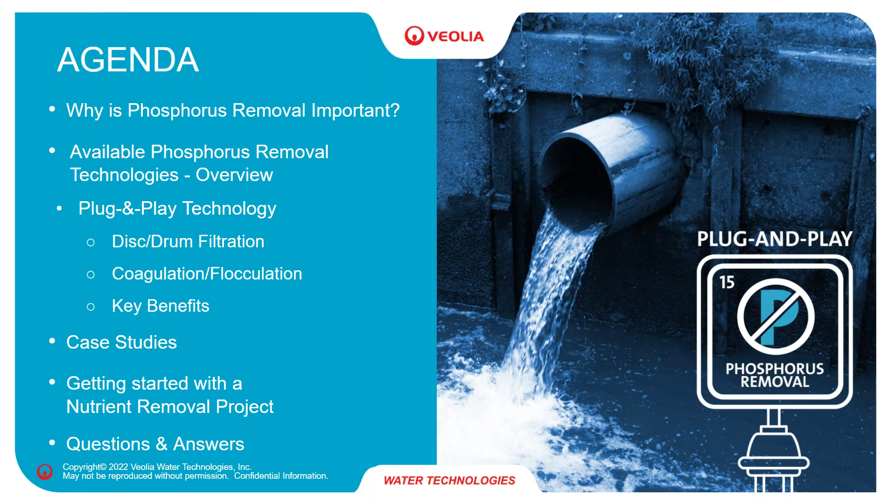We'll talk about those benefits, and we'll share with you some real-world sites that have been able to implement this successfully, those case studies. Finally, we'll sum up with a few tips on how we can coordinate with you and help you get started if you have a phosphorus removal project you want to look at. And then we'll have some time for questions and answers at the end.

So as I said, we'll start with a little bit of groundwork. Why is phosphorus removal important? It really comes down to our environment and the impact that nutrients can have when discharged into the waterways.

When these nutrients, nitrogen and phosphorus-based compounds, get into the waterways, it really results in the algae that is present in those waterways using that and growing excessively. This is called eutrophication. And when they do that, they're uptaking the oxygen in the water, and that has a negative impact on the aquatic life. So many places will see fish kills and other damage to the ecosystem there, which is not a good scenario.

It's also can be quite unsightly from a tourism and swimming type scenario. So definitely things that the governments and the people have decided that this is not something we want to continue.

In terms of sources of where this comes from in wastewater, it can be residual nutrients from the processes that a particular plant may have. Could be cleaning chemicals - many of those use phosphate type compounds in their chemicals and detergents - and then nutrients inherent to just organics. So farming and even municipal wastewater carries with it nutrients laden in that.

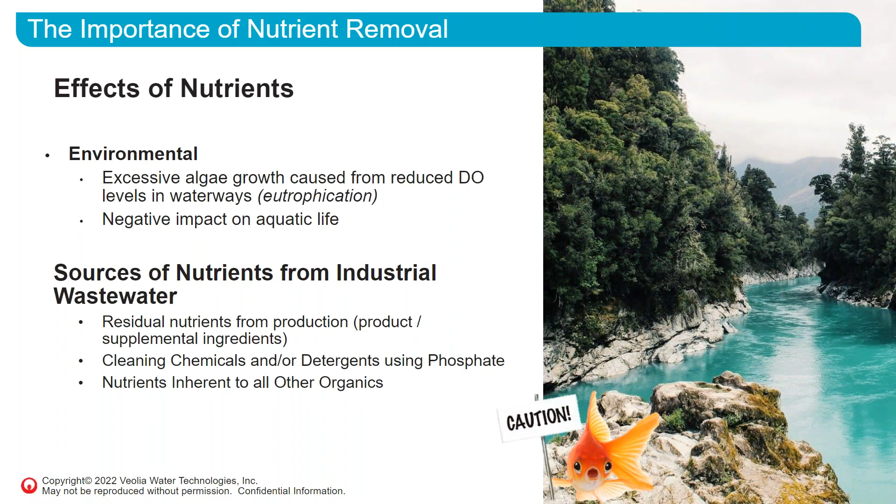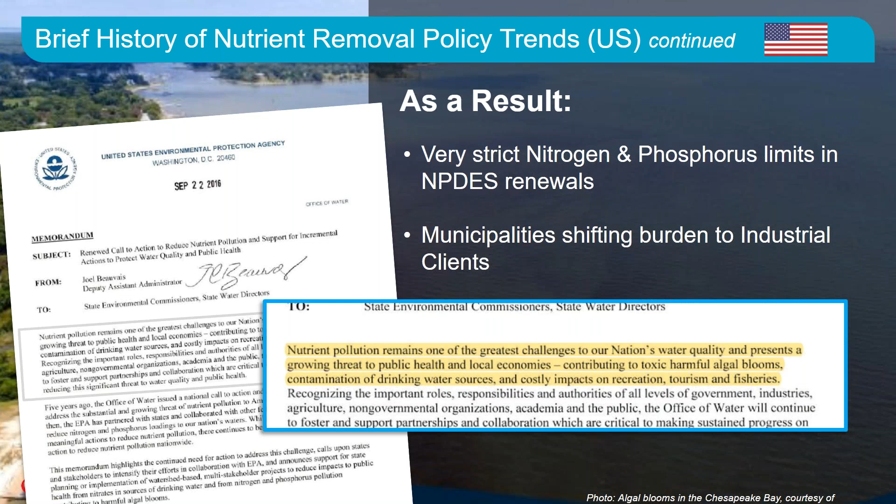Nutrient pollution remains one of the greatest challenges to our nation's water quality and presents a growing threat to public health and local economies, contributing to toxic, harmful algal blooms, contamination of drinking water sources, and costly impacts on recreation, tourism, and fisheries.

We have many attendees here, I believe, from Canada as well today, and a very similar scenario, although regulation for Canada is really at the provincial level. Nonetheless, an evaluation is really made at the local level with these receiving water bodies to determine how sensitive they are and what types of impact the wastewater could be having coming in, and what the limits need to be as a result to try to limit and improve those impacts and improve the water body.

As an example, in British Columbia, while sea outfalls really don't have any requirements overall, the province has a 1 milligram per liter total phosphorus limitation, but then sensitive water bodies such as Okanagan Lake can have more stringent limits, as we see here with a total phosphorus of 0.25 milligrams per liter.

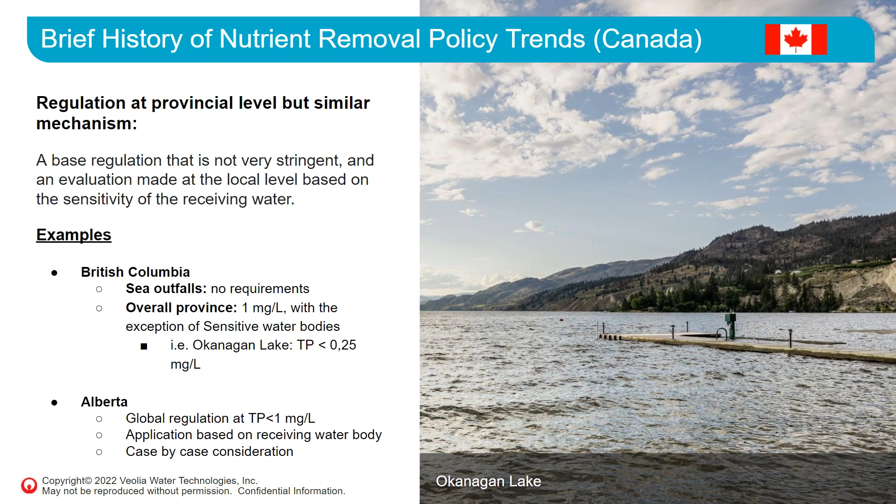And then again in Alberta is another example - global regulation within the province of total phosphorus less than 1 milligram per liter, but it can be a case-by-case consideration on whether a receiving body may need to have more stringent limitations for those ones that may be discharging into that water body.

Now, what are some key applications that could be affected by this? Well, it really is a wide spectrum, as you can see here, from dairy, food and bev processing, meat packing, fertilizer producers, metal finishing, where they can use phosphate type chemicals in that process, and of course municipal wastewater, as we mentioned earlier.

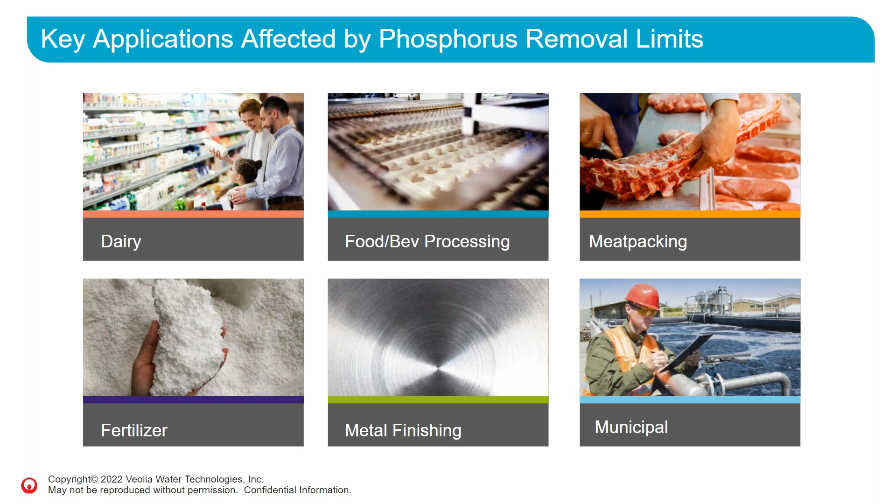So this certainly doesn't cover all of those industries, because at the end of the day, if you have a limitation that needs to be met, then you're impacted here by this and the need to remove the phosphorus.

So we're going to go into the discussion of technologies, and from sort of a big overview perspective, many plants will have many stages of treatment. You could have primary treatment to remove solids at the first stages of the plant. Many times these stages, if the plant has a nutrient removal, will implement chemical dosing to enhance their primary treatment in order to start to remove the phosphorus.

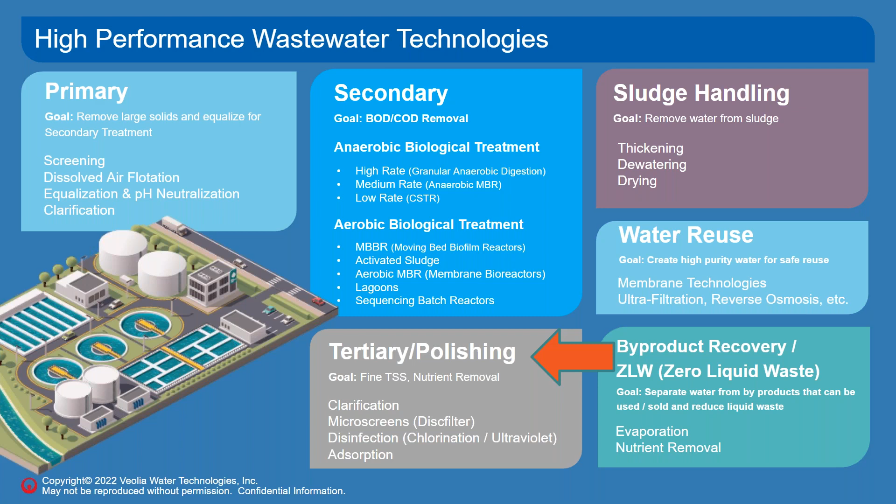Secondary treatment is another key component, where you can have typically biological treatment to help with removing phosphorus. That's very effective. The technology we're going to share about today would usually be considered the tertiary or polishing step, to really get to the low levels of phosphorus removal and effluent limitations that need to be met.

When we talk about phosphorus or nutrient removal, today we're focusing on phosphorus. There's two main categories or methods. One is biologically, systems like activated sludge, sequencing batch reactors, MBBR, membrane bioreactors. All of these use a biological treatment system with bacteria using the nutrients and uptaking them in order to process and remove them through the floc, being disposed of through the biological sludge from those processes.

Alternatively, you have physical or chemical methods of removal. Physically, we're talking about clarification, so settling, either traditional clarification with large retention times and a settling mechanism, or high rate clarifiers that use methods to speed up the process and get solids to settle faster. Could be flotation, could be filtration, from media filters to actual cloth filters. But many times phosphorus is not only in a solid form, it can be dissolved in the water. When it's dissolved, a chemical step is needed to turn that from a soluble form to be precipitated with a chemical reaction into a solid form. That's what we're talking about with coagulation and flocculation, and those steps can be combined with physical separation to increase phosphorus removal.

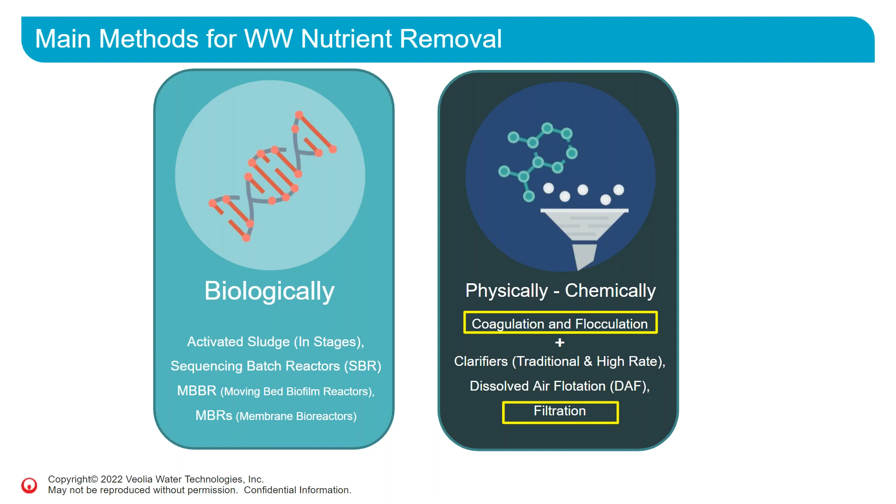All right, continuing then with just a very rough, not highly detailed, but from a general standpoint, most sites will be able to use biological treatment for achieving levels down to about 1 milligram per liter of total phosphorus. Having said that, these other methods can also be used to take higher levels down to that as well. But oftentimes many sites, if they have biological treatment, will achieve about 1 milligram per liter with clarification and settling or flotation, whatever process they have on site, maybe with some backup means of coagulation for trimming and meeting their effluent limitations.

Typically, to get down to less than that, into the roughly 1 to 0.5 range, a client may need to add another step behind the clarification method. That could be microscreens as an example of filtration following the clarifiers. That will typically get to about 0.5 milligrams per liter.

Getting down to below that, into the say 0.3, 0.2 range, would require an added step ahead of those filters with coagulation and flocculation, and I'll be explaining that as we talk further. That could typically get you down to as low as below 0.1 milligrams per liter, and then ultra low, less than 0.05, you're talking about quite intensive membrane filtration to achieve those limitations.

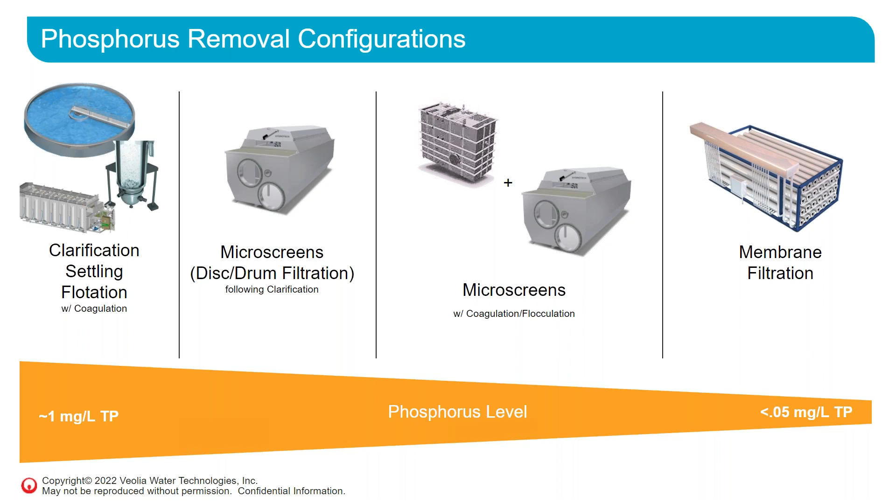So we wanted to share here with this webinar specifically the technology we call plug and play phosphorus removal process, which we've termed Nutri-Pack. Pack just being focused on the plug and play aspect and being able to package this together.

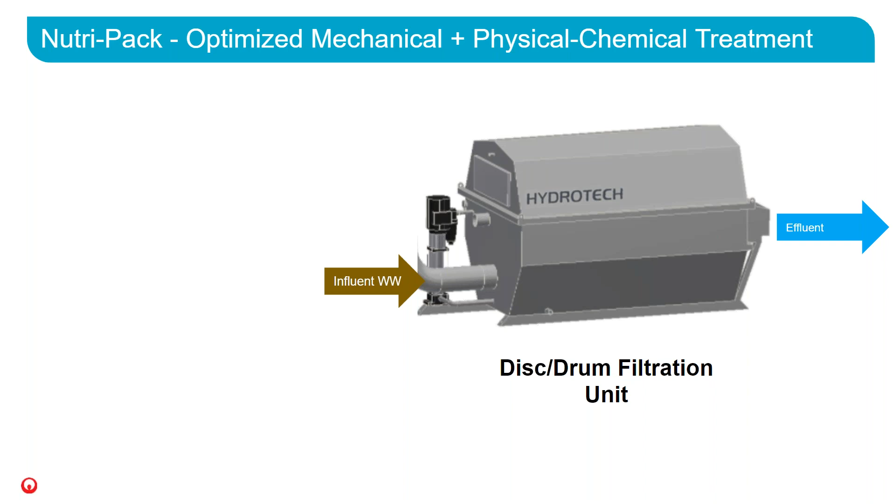This is focused around our Hydrotech filtration technology. It's been established for many years, and this is either a disc or drum filter. The exciting thing here is we now have a few categories where we have pre-engineered coagulation and polymer systems to allow this to be coupled up and get removal of not only particulate phosphorus, but if you have soluble phosphorus in solution needing to meet low limits, this can be added on and packaged with the system to meet those needs. We'll be sharing the details on this.

So first, to talk about the filters, Hydrotech filtration - this is a proven technology. I started selling the disc and drum filters in the 1990s, so over 20 years of experience with this technology, with continued development to improve it.

It's what we call an inside-out filtration process. It's very effective at solids removal. The media ranges from 1,000 micron in size down to 10 micron, and at those small 10 micron opening cloths, we can get very effective solids removal, up to 95% suspended solids, which helps us achieve high levels of removal when precipitating phosphorus and trying to get it out of solution.

Very small footprint when compared to other filtration technologies, particularly sand filters or in extreme cases clarifiers. This will be just a fraction, could be 10% or less of the footprint required to treat the same flow capacity. And then it's very efficient.

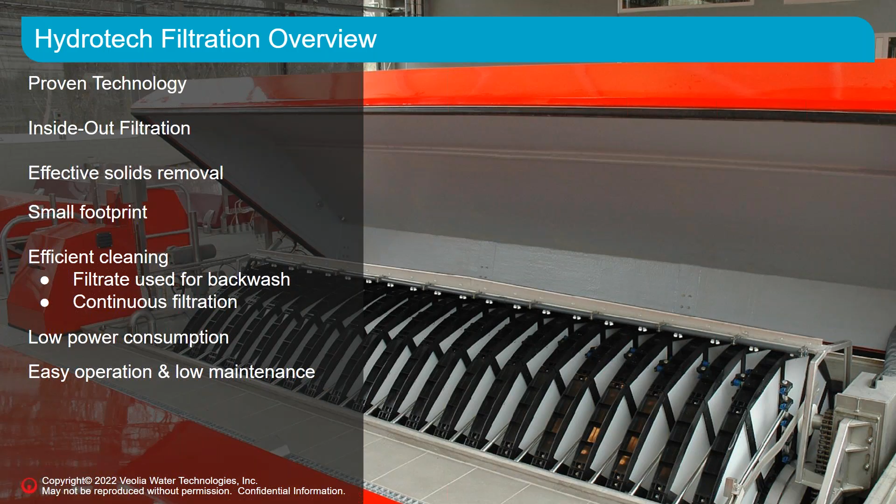For the disc filter, from that drum the water flows inside to the inside of discs with woven cloth media on each side. For the drum filter, the water flows inside and then goes through the circumference of the cylinder where the media is wrapped around the unit. But in both cases, the effluent flows to the clean side.

The solid particulate is captured on the inside of the media, and then the clean filtrate is discharged over an effluent weir.

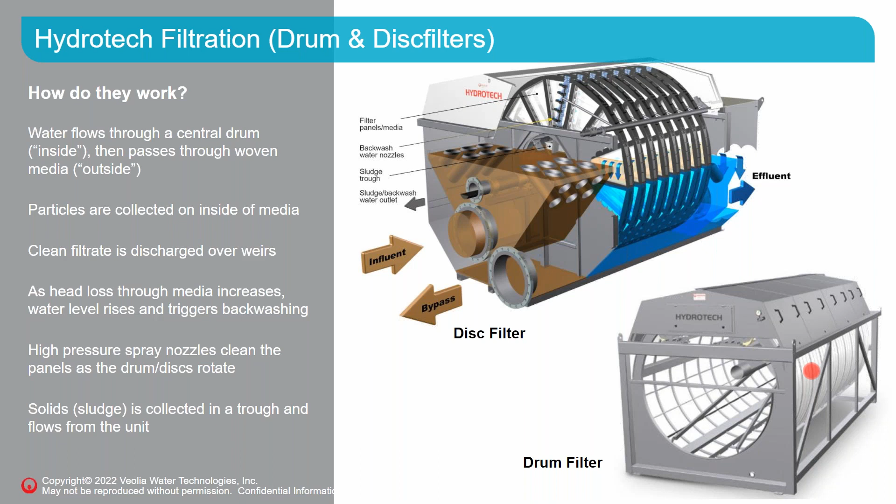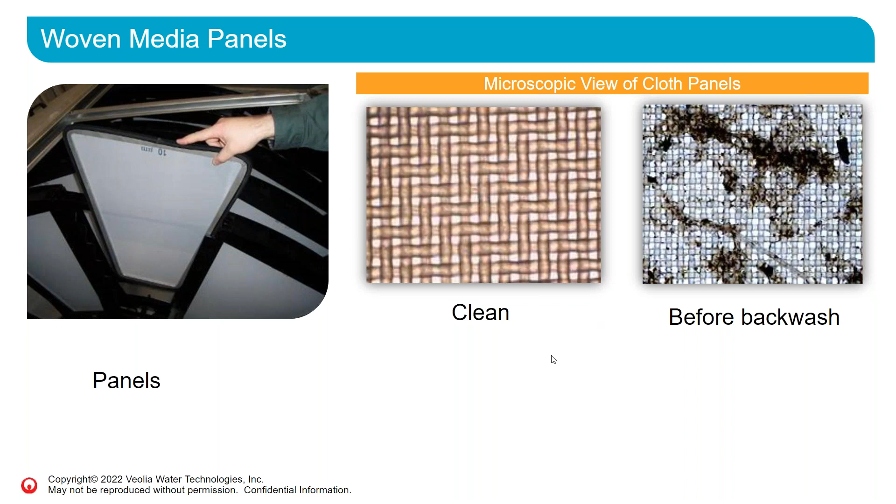Here's just a couple of photos to show you what a disc filter media panel would look like. You can see it's very accessible, easy to inspect, as well as easy to access for replacement if needed. Here you see microscopic photos of clean woven media, and then before backwash with the solids collected.

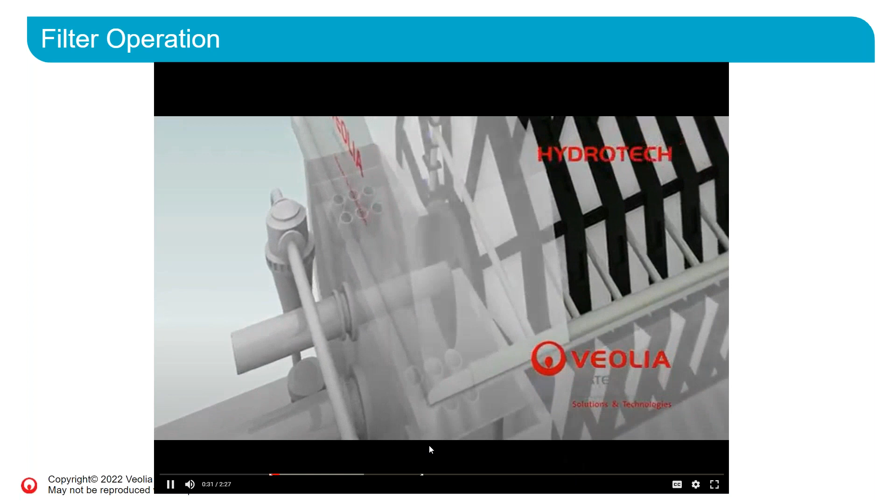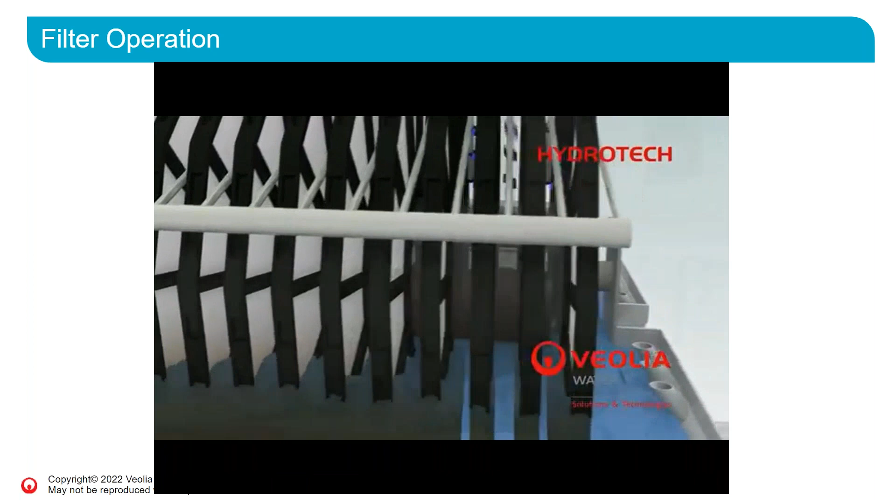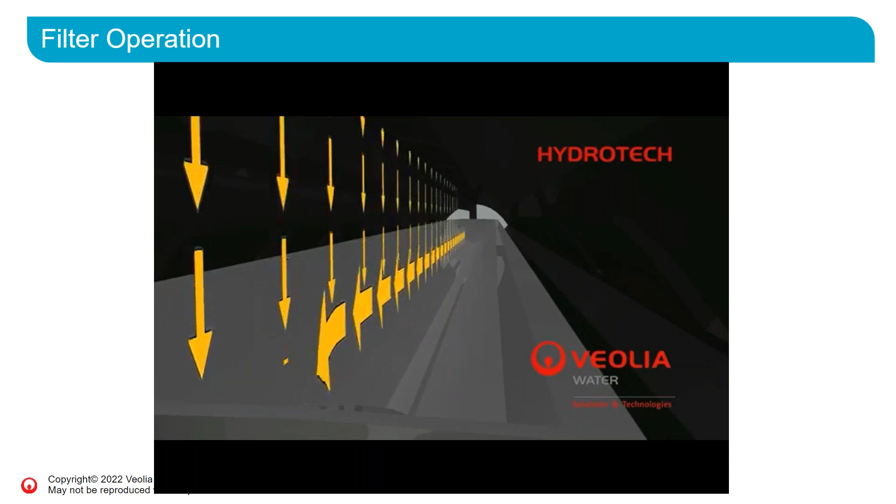I want to share a quick video here to talk through the process again. You can see with this computer generated animation the water coming into the central drum, flowing through the media panels, with solids being collected on the inside. The clean water flows out through the filter panels over a discharge weir. As solids are collected, the inlet water level rises and triggers the backwash, which starts the rotation of the drum and the high pressure spray to knock solids from the inside surface. When the solids are removed, they flow into the trough and gravity flow out of the unit with the backwash water and sludge being removed.

So now I would like to talk about combining that technology with coagulation and flocculation, because this is the key step when we're looking at phosphorus removal that is in solution. If we talk a little bit about pre-treatment chemistry, if we have influent coming in, we would need to dose some metal salt, typically based on either ferric or aluminum-based metal salts.

This will have a chemical reaction with the solubilized phosphorus and produce particles. However, these are typically what we would call unstable particles, not very strong or of adequate size for us to capture them on the filter media. For us, size and strength is critical.

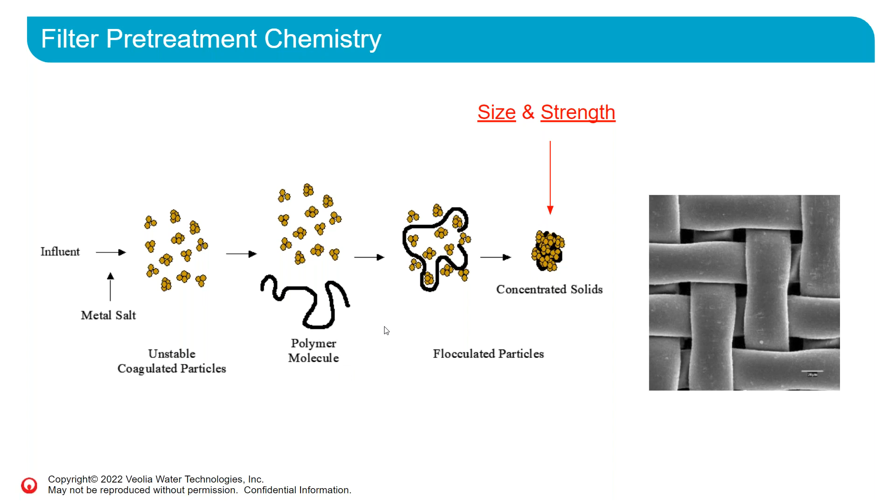And so polymer is typically added. You see the polymer molecule, which when combined with those coagulated particles forms a nice floc, concentrated floc that can be captured on the filter media.

And here's just an example site photo. This is a drum filter, but you can see really heavy, solid, good flocs there that the filter can then capture and remove.

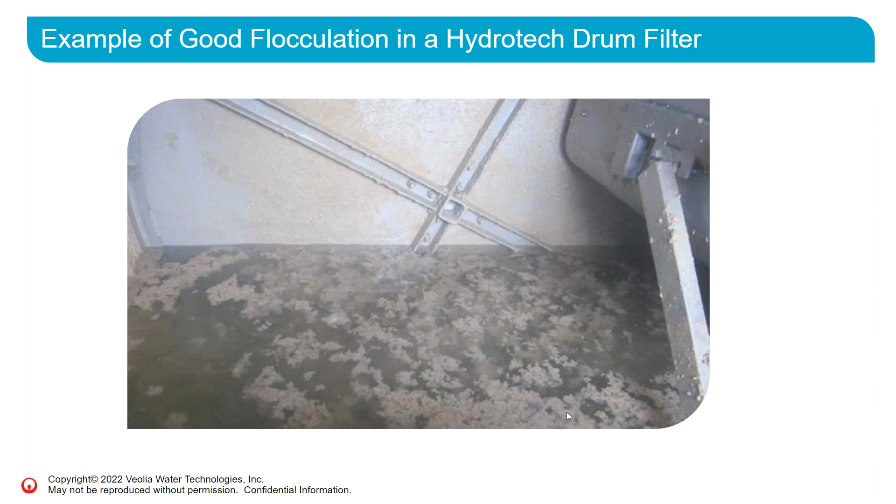Where does this fit in your treatment process is a question often asked, and it could vary depending on the site and what the needs are, but here's an example of a common location where it would be placed into the system. If the client has existing biological wastewater treatment, such as activated sludge, they may already be dosing coagulant upstream of their clarification step or flotation step.

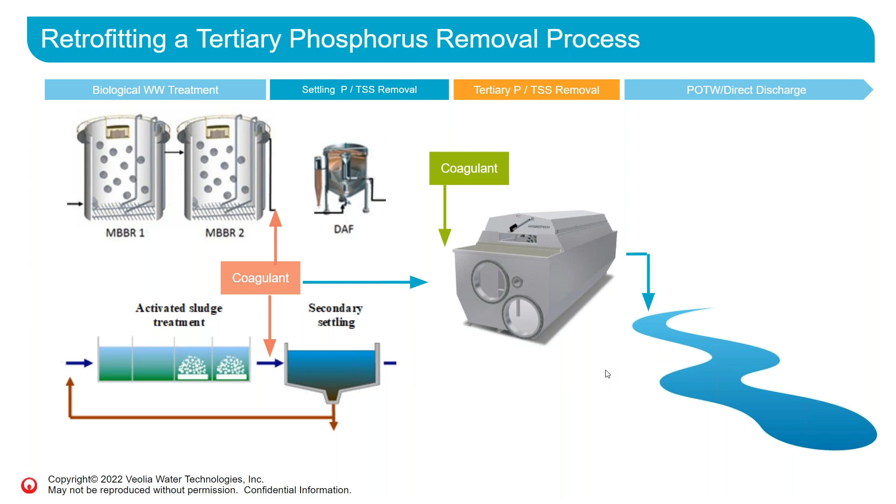And so this could be envisioned as a tertiary plug-and-play system to put in, depending on the limits, either with coagulant, which would be key if the phosphorus is in solution, or if they're close enough and feel like the 10 micron media can remove the particulate, then it may be adequate to just add the filter and achieve their demands before going either to the local municipal treatment works or direct discharge.

And here's a diagram just to show what we're talking about of the whole system here. When we're trying to remove soluble phosphorus, we'd have water coming in, dose the metal salt, as we mentioned, typically with a mixing stage with either a rapid mixer or a static mixer required to provide a thorough, good mixing of the coagulant in the water stream, followed by several minutes with a vertical stage mixer of coagulation.

Several minutes of retention time. After that, a polymer would be dosed before feeding into a flocculation stage with, again, several minutes of retention time and mixing before going to the filter. At this stage, we've built a good, strong floc of good size and strength that can be efficiently removed with clean effluent, and the solids can be collected to take to discharge.

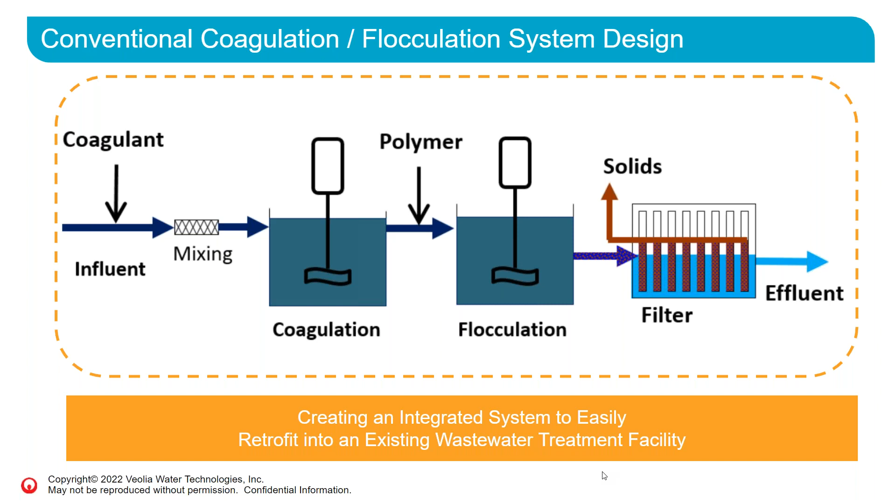What we really wanted to focus on here today is that this entire system shown in this box can be an integrated system that easily retrofits into an existing wastewater treatment facility. Certainly all these steps could be acquired individually, but we feel like there's a big advantage. The expertise and experience we've had implementing these systems has allowed us to key in on a few flow ranges and provide pre-engineered systems to make this easy for a facility to implement.

Again, that's what we're looking at here with the pre-engineered coagulation and polymer systems. This includes both tanks, mixers, and the dosing. We typically would use dosing pumps for coagulant and polymer included before feeding to the disc and drum filtration unit.

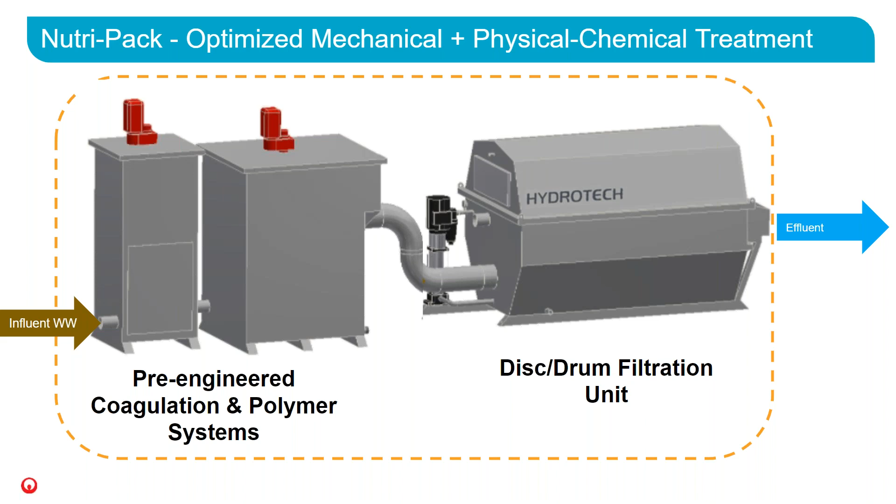And again, just to highlight what's included in that box, what is being provided here: we're talking about the coagulant mixing, which is several minutes of retention time with a mixer, and floc mixing, again several minutes of retention time, before going to the filter for discharge.

Also included is a coagulant dosing pump and polymer dosing system, make-down and dosing both. And then finally included with that is our control system with controls strategy PLC logic that we've developed with feedback and feed forward control, which we've been able to prove by using instrumentation to measure the water conditions to get a very effective, dialed-in dosage. Some of our clients have seen pretty substantial reductions in chemical usage, as well as savings in the volume of sludge produced because of the efficiency of that process.

Other options are digitally enabled remote monitoring connected to this system through the cloud. We can also provide semi-automatic deep cleaning. Many times when using chemicals, the filtration will need periodic cleanings, and there are several stages of cleaning that can be provided as add-ons to help with that process. And then finally, chemical and equipment services is something as well that we can offer to help the client as needed.

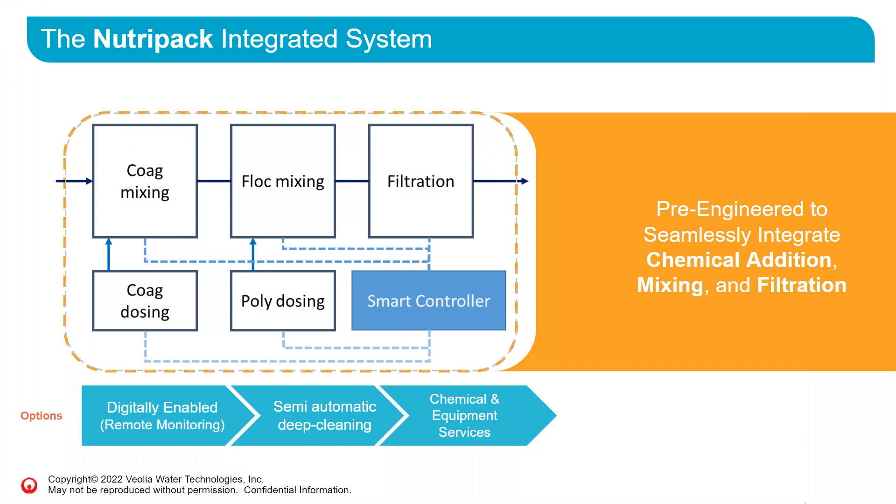So what are the key benefits of this NutriPack plug-and-play solution?

If we focus on performance, when you need to get these low levels of phosphorus—in some cases we're seeing locations with permits for less than 0.1 milligrams per liter total phosphorus—it's key to have a solution that can achieve that. We've proven it with pilot studies, R&D, and now full-scale operating sites. We can achieve a 90% reduction of phosphorus.

Also the total suspended solids, achieving a high level of reduction there. With the PLC logic we've developed, in both pilots and full scale, we've seen increased savings for sludge disposal and production, because you can target dosing compared to coagulant dosed upstream where it's not as effective. There could be interference from other sources such as carbon-based contaminants and pollution. Here you're dosing it downstream at the tertiary level, where you can really focus on the phosphorus and reduce coagulant consumption.

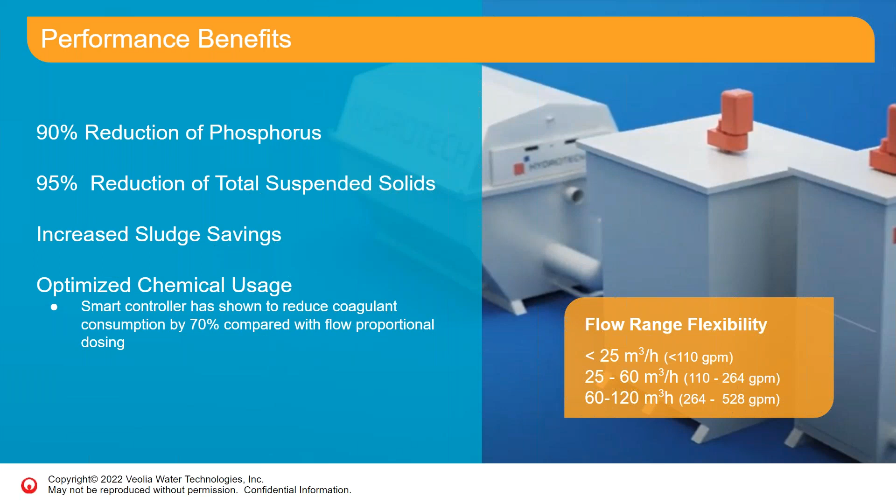One of the key benefits here comes down to footprint. We talked about performance—now, if we talk about footprint, this goes into a number of areas, but footprint, whether industrial or municipal, is often associated with dollars. Just as we'd sell a house at so many square feet or cost to build it, it's the same here for implementing a new treatment solution to help meet a limit.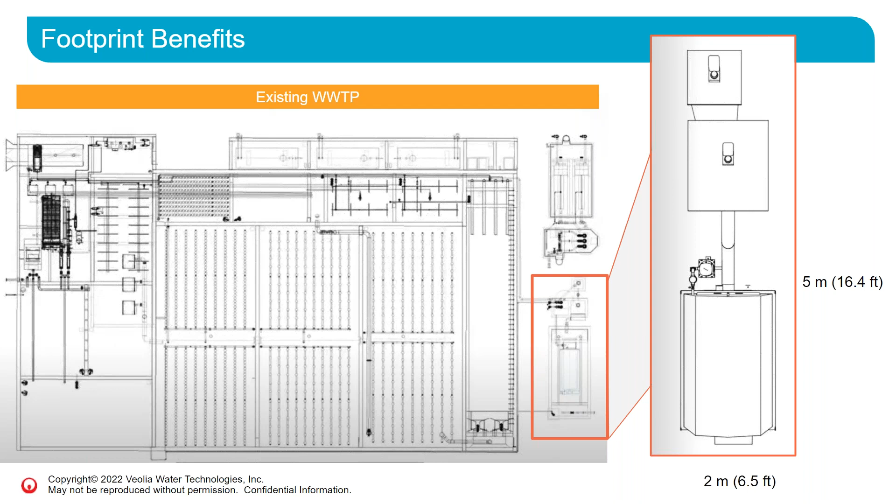Final benefits I wanted to highlight are implementation benefits. Again, these 3 flow ranges are pre-engineered—you can package this up with the tanks, the filter, the controls, and the chemical dosing, all pre-engineered and ready to go. This saves the client time and money, not having to research this themselves or have a consulting engineer chase it, or work with several different integrators—instead having one integrator for this solution, with in-factory mechanical and process checks to make sure it's functioning well.

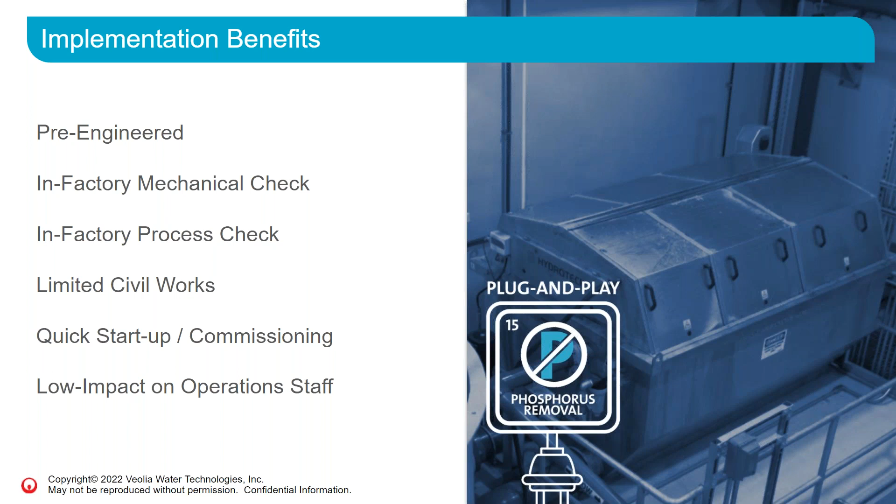There can be limited civil works, either to put this on grade, in a small building, or we can even containerize it to ship right to the site. There's a relatively quick startup and commissioning, unlike some processes that have long startup times—once it's piped and electrically connected, it's ready for service. And finally, there's relatively low impact on operations staff, since it's simple to operate and maintain.

We thought it would be helpful to wrap up with a few examples of how the technology has helped clients succeed. This looks more holistically at full-scale implementation, from large sites up to 30 million gallons per day, or almost 5,000 cubic meters per hour, down to very small plants at 70 cubic meters per hour, about 400,000 gallons per day.

Each client has different needs, some not as stringent, but many of these listed here target even down to 0.075 milligrams per liter. These clients are many municipal but also industrial, so this is a mix of locations, both municipal and industrial, using this technology for their phosphorus removal.

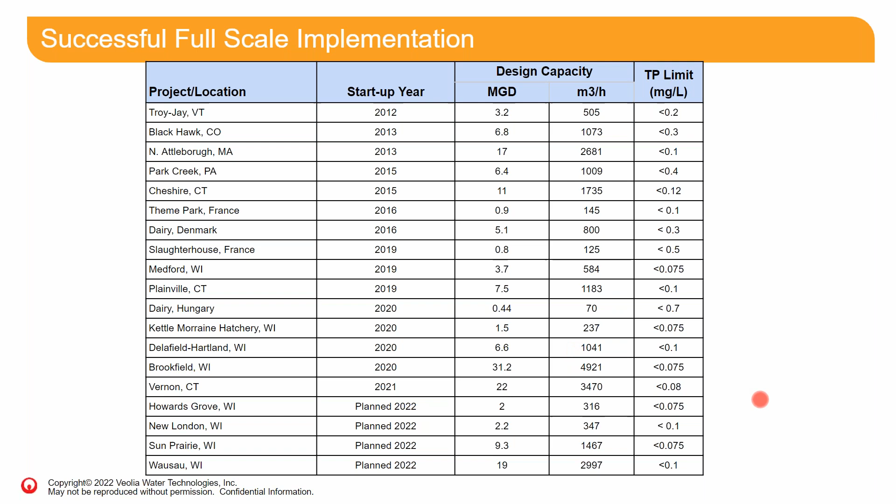Some specific locations. This is a location in Pennsylvania - a chocolate producer, many of you would well know the name. They had an overall need to provide an upgrade and replacement of their outdated wastewater facility. They also wanted to future-proof themselves, prepare for the future and what the limitations could be.

For their design basis specific to phosphorus, they were looking at an influent of around 7 as the design basis, and a need to meet an effluent discharge of less than 2. You can see in this case they have a number of biological stages. They have a DAF for flotation to remove solids, but they also had a need to implement a polishing step, the Hydrotech disc filter, with a flocculation stage prior to that, in order to catch and polish those final particles of phosphorus and get the limits they needed.

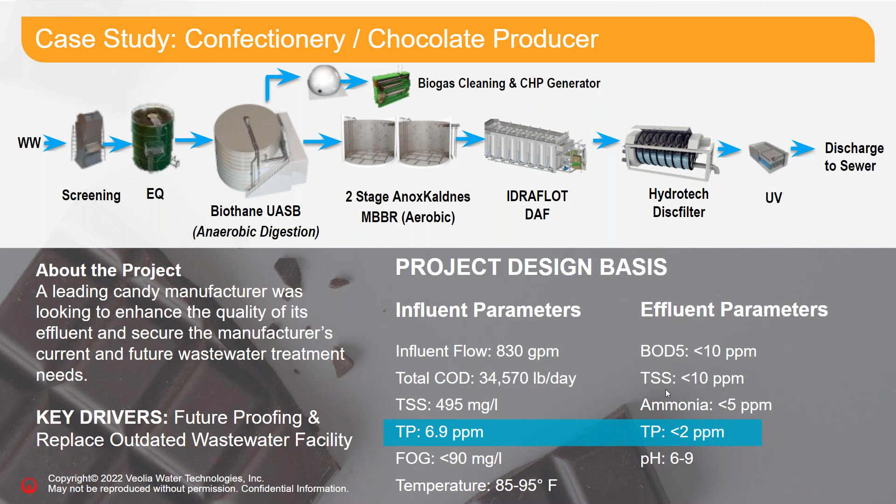Here's a graph to show some results we've gathered. These levels of total P are for the overall facility, and you can see that while the design basis was targeted at about 7 - 6.9 was the design basis, so about 7 milligrams per liter - it was actually in many cases even above 10 and up to 15 milligrams per liter. Despite that, they were able to meet the overall average target of less than 2 in the final effluent, with the disc filter being a key component of that treatment system.

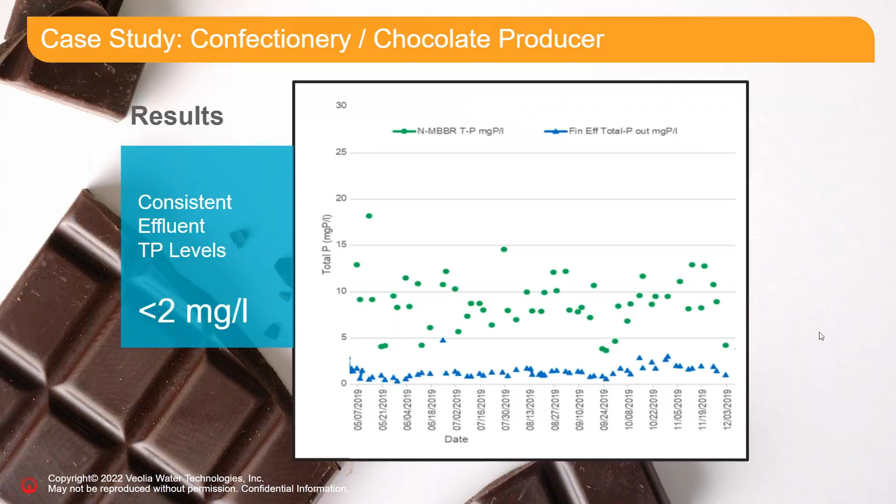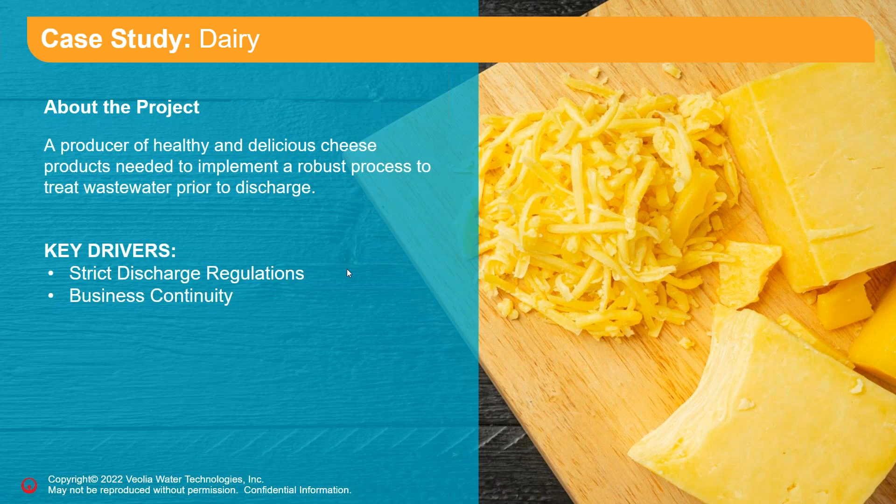Another case study here was a dairy client making cheese products, who again needed to implement a process to treat their wastewater prior to discharge. Key drivers here were really the discharge regulations and being able to keep this business running and meet their production goals. Their influent has averaged about 3 milligrams per liter. They are up and running and consistently meeting their target, which is stringent for them - their limitation was less than 0.7, and they are able to achieve that. This site has chemical pretreatment tanks upstream with coagulation and flocculation, followed by the filtration system.

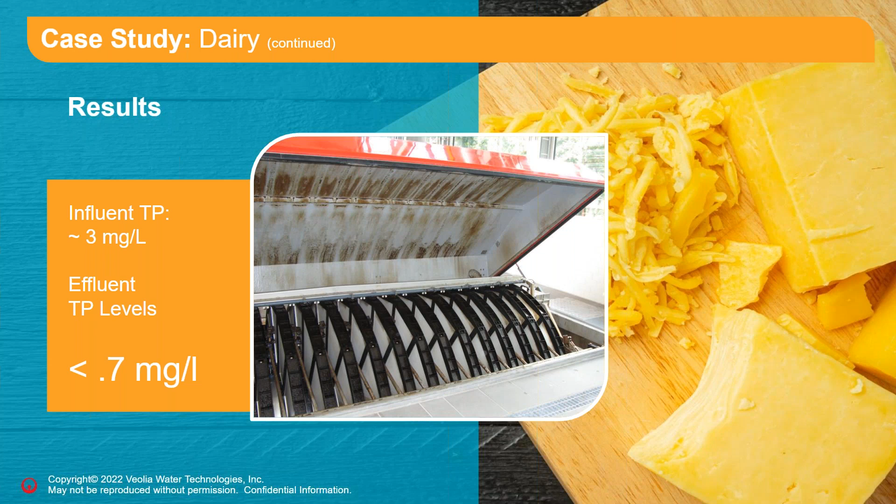I also wanted to mention this municipal case. This was an existing wastewater treatment plant with a target of less than 0.075 milligrams per liter of total phosphorus to be met by 2024. They were not able to do that with their current wastewater treatment plant. So of course regulatory compliance was a key driver for them, but another driver was to try to be compact and stay within the existing footprint of the facility.

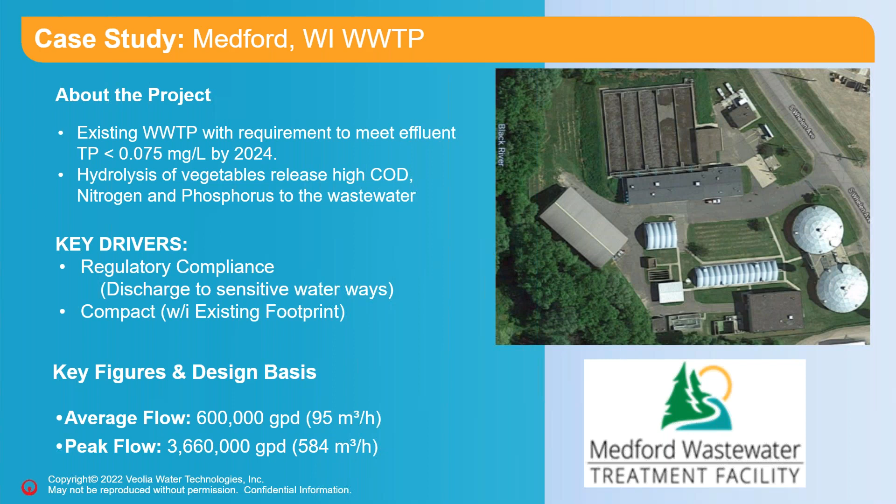The Hydrotech filters were a key part of that because they were able to be placed inside the existing infrastructure. These basins you see that the filters are installed in were prior sand filters. This was a big advantage to this site to be compact and fit into their existing footprint.

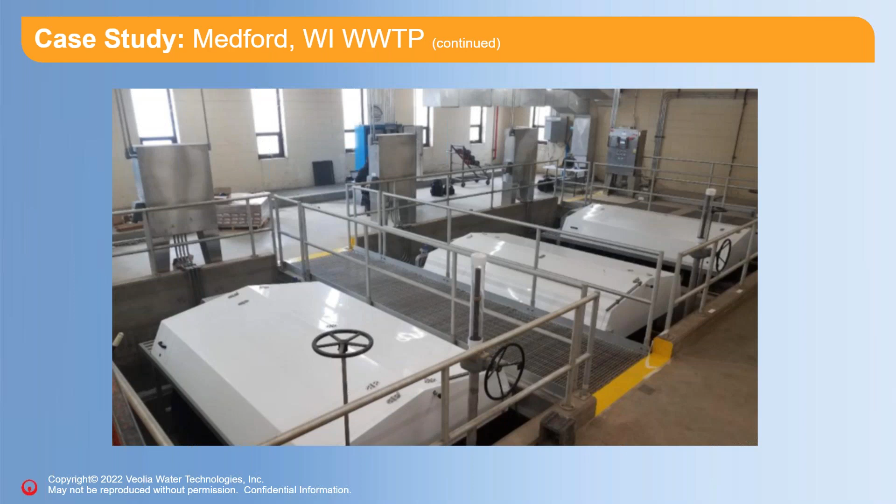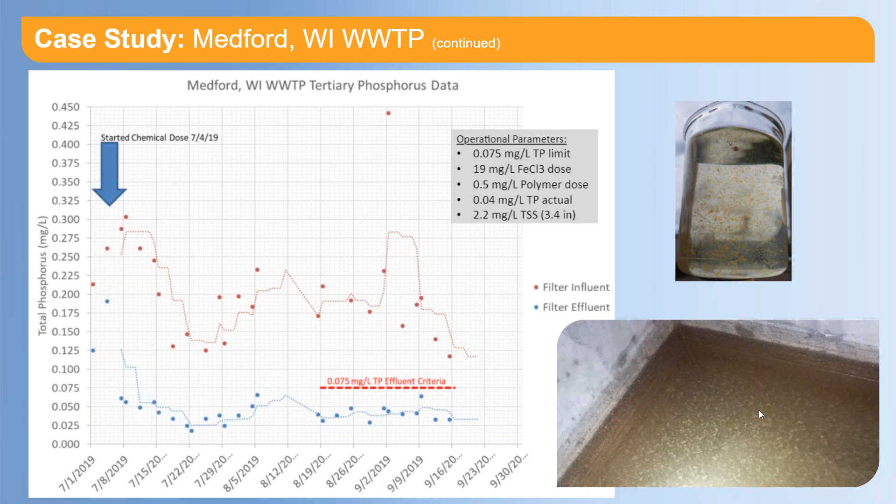So how would we get started if you have a need and are interested? A key thing would be to know what the goals are - what do you need to achieve? New and updated permits or regulations are a starting point. Knowing what your current system is doing and the performance it's getting - data collection is a key part of that in order to establish where we're at and where we need to get to. If that's not on hand, then maybe we can use production numbers or other methods to estimate and determine what the current situation is and what our system can achieve in order to get to where the site needs to go.

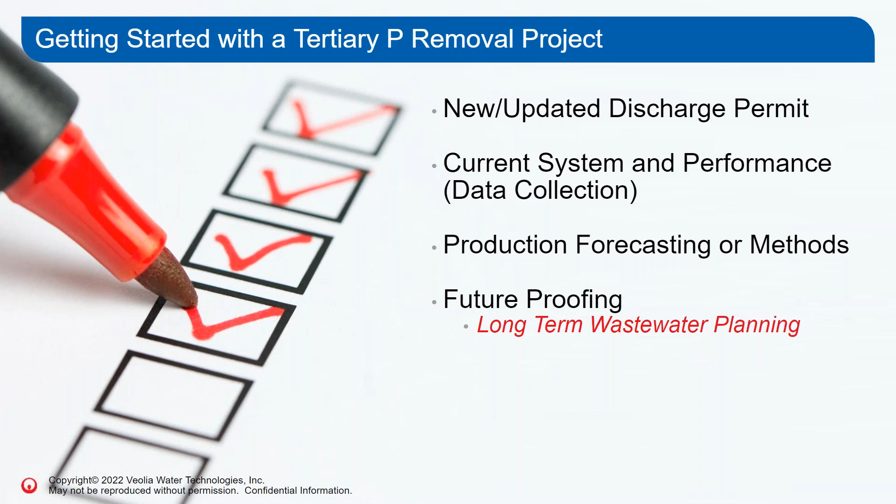And another thing, maybe that's not the current scenario. Maybe you don't have the existing limitations, but you're looking to future-proof or prepare for long-term wastewater planning. That could be another scenario where you may want to reach out to us and say, I don't have an immediate need, but I do want to be prepared in case this comes down the road several years, because I'm hearing that in our locality that this is a concern. So that could be a reason to get started and to reach out to us.